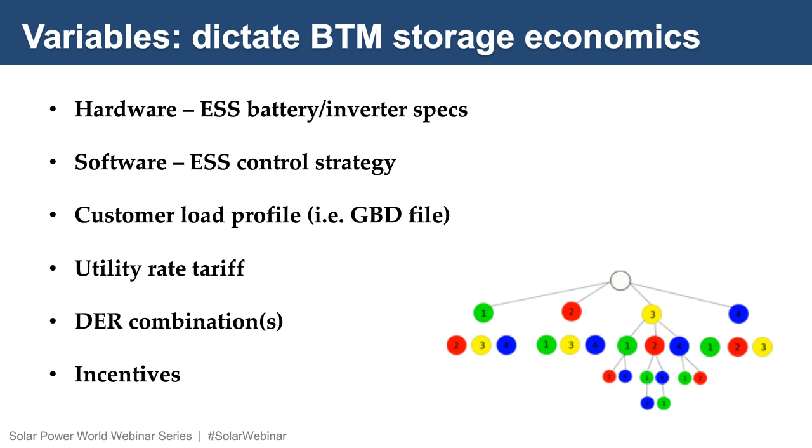So from there, I want to do a really quick overview on this term control strategy that we use. And this term can be used interchangeably with the battery management system. And again, this is the software layer or the instructions that dictate when the battery charges or discharges. And obviously it's determined by the value stream opportunity that the BMS, the control strategy, is going after. It's also determined by any other rules or constraints.

For example, maybe you have a constraint on the battery management system that says energy storage must charge from solar. Or maybe you don't have a constraint there. Maybe you have a rule that says when you run your simulation, energy storage cannot export to grid. Or maybe you do not have a restriction there. So that's really the set of parameters, and we're going to look at those and exactly how you define those in Energy Toolbase in just a second here.

Okay, I've got one last setup slide. I've been giving variations of this presentation a lot recently, and I want to include this slide and just talk very briefly because I want to draw a line between the two types of software performance modeling tools in storage.

So when we think about forward-looking performance modeling, we're kind of talking post-commercial operation date. Basically, for an operational storage system in the field. And there is a software control layer that is making predictive decisions that is dictating how that battery is charging and discharging, again based on some of those things we just talked about. If it's trying to optimize for peak shaving, sometimes this gets to be very, very sophisticated. You know, they're doing machine learning things, and there's companies that really specialize in this.

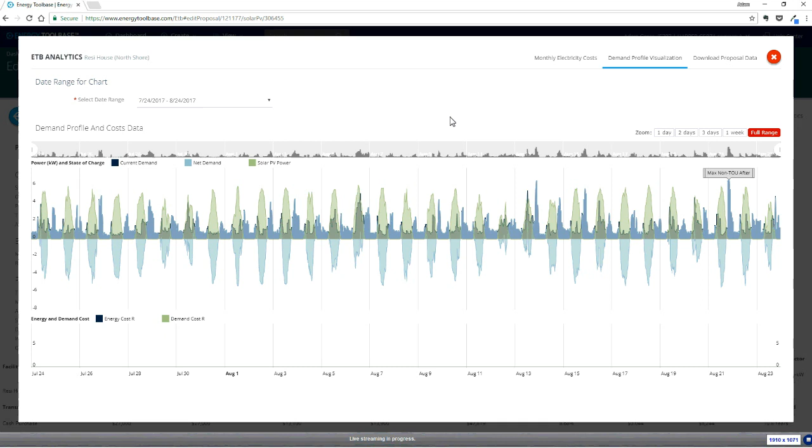We have a really nice summary view. If you jump back to the dashboard, I'm kind of hovering my mouse, I'm waiting for the screen to catch up. There you go, over here on the right. And under the export value, you can see 64% of all of our solar production is getting exported to grid for this project I set up. You know, that's crazy. We're talking about 2 out of every 3 kilowatt hours being sent back to grid.

And the way we've configured this project in step 2, this customer would be getting killed, right? I mean, two out of every 3 kilowatt hours is worth 0. And you can actually see that effect here. The average blended cost of energy for this customer is in the 27-cent range. The average blended value of solar is under a dime. And it's obviously a result of the fact that so much of our production is getting valued at 0.

Okay, so this is obviously an unrealistic project. Certainly in Hawaii, you would never sell your customer a system that's exporting that much energy, because the economics is just giving energy away for free. So let's go now. Everything else equal, I've duplicated that deal, and all we're doing here is we're going to add in a storage system. And that's managed through step 5 here in our edit proposal screen.

Let me just give you a really quick setup for the different variables that a user dictates. There's basically 2 sets of variables. One is the hardware side. We're calling this the system characteristics. For my demo deal here, I have a 10 kW, 20 kWh storage system. So that's a pretty good sized residential storage system. I'm running this at a 90% round trip efficiency and 100% depth of discharge.

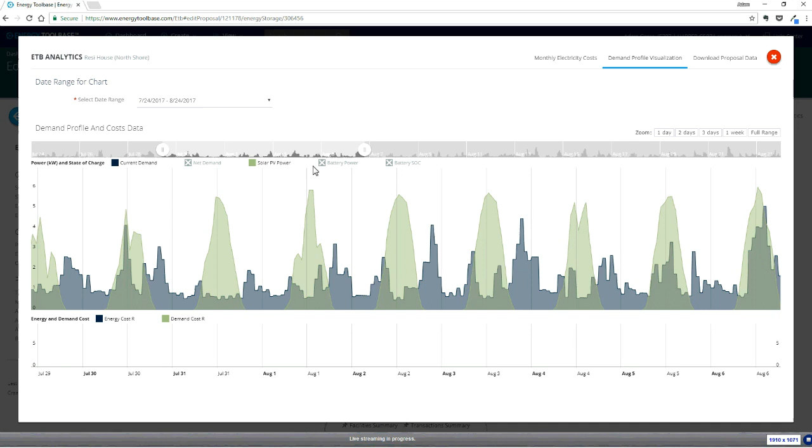Okay, there's obviously a lot of data on the screen right when you open it up. Let's just zoom in to a week, and let's do one thing at a time here. So I've got usage data on the screen only. Let's go and overlay our solar production. Okay, those would all obviously be exports. Now let's layer in our charge-discharge profile. So that's the battery performance data. And actually, I'm just going to click all of them on concurrently, and we'll talk through this. It looks like there's a lot of data on the screen, but you really need to interpret this to find out what's happening.

So let's really key in on this day right here, August 2nd. If you see where I'm hovering my mouse, a really key data point is the red dotted line. That's state of charge. So we're coming into the day empty. Actually, let me zoom into just a couple of days there. It's a really dynamic module, this visualization screen, which is nice. Okay, here we are. We're coming into the morning on August 2nd. We're producing more solar than we're using, and the battery is doing what we would expect it to do. It's charging, all the way up until 2:15 in the afternoon.

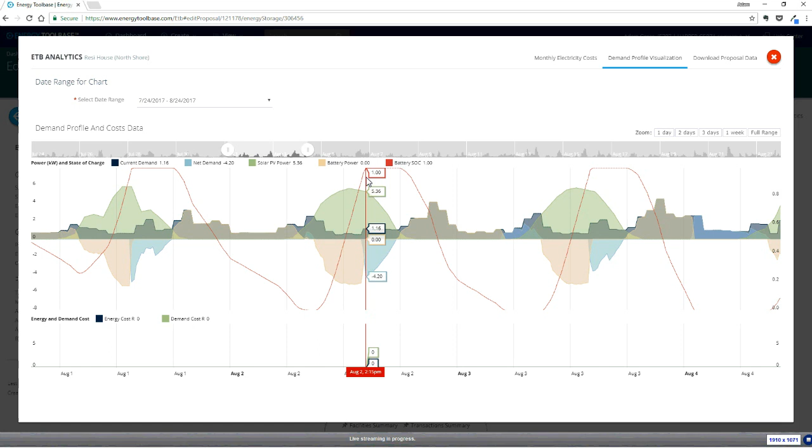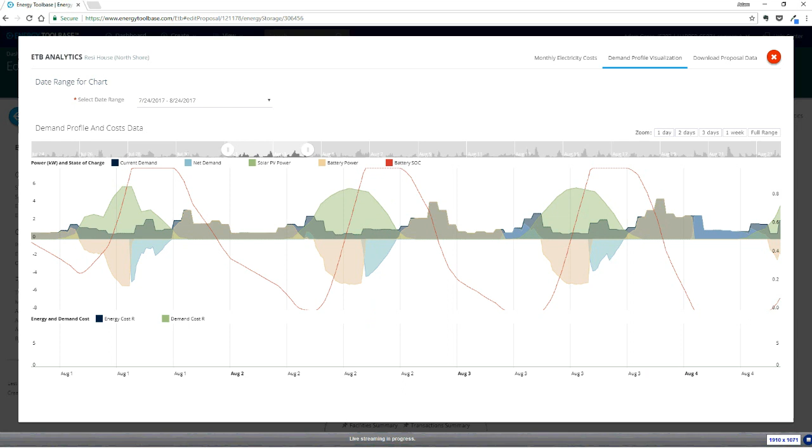At 2:15 in the afternoon, where I've got my mouse hovered right now, we've hit 100% state of charge. That's another way of saying our battery is full. We've got no more room left to store energy. So as we go later into the afternoon, you can actually see some exports to grid. That's that light blue line. If we go out to a full range, you can sort of see that same effect for a lot of different days based on this simulation.

So the battery's doing what we instructed it to do. It's preventing exports to grid, but the way the solar system is sized relative to the customer load, and based on this battery system that we spec'd, 10 kW, 20 kWh, we still are getting a little bit of exports.

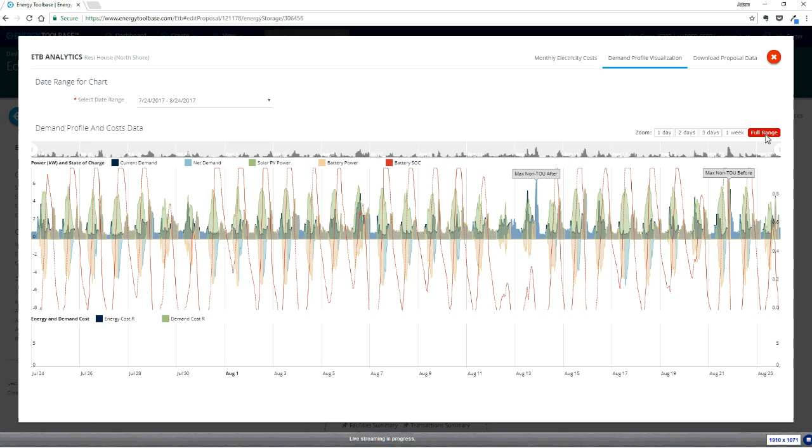We've got a really nice summary view. If I was to click out of here, let's kind of just add it up. What happened? So everything was the same except for the battery. And over here on the right, this is kind of what we looked at earlier. Whereas before we were exporting 66% of our energy to grid, we're able to knock that all the way down to 10%. That's very, very significant, obviously.

And for this particular project, where you have a really strong price signal to not export to grid, we're going to do really well. And this is also another awesome summary view here in step 5. The title of this presentation today is Quantifying the Savings of Storage, Quantifying the Economics of Storage. The most common kind of question and inquiry that we get is, well, what did my project do in dollar terms? And we've got a really nice kind of transparent summary of that number.

In dollar terms here, the blended savings on a dollar per kilowatt hour basis is $77 per kilowatt hour. It's over the kilowatt hour capacity. So a really quick way to calculate what that is, it's basically $77 times 20 kilowatt hours. So we were actually able to save $1,540 for this storage system, this 10 kW, 20 kWh, for this particular customer, just purely from storage. And obviously, this is an extreme example. This is Hawaii, and this happened to be for a customer exporting a lot of energy.

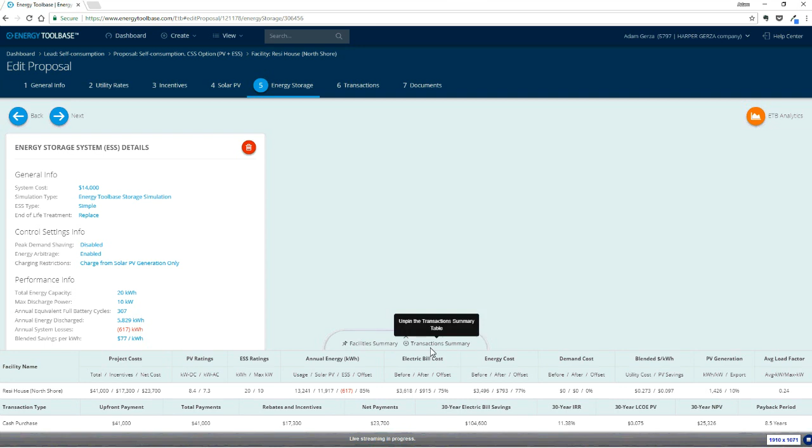Okay, now this is going to be a really awesome segue to show off our optimization engine. So a lot of you are probably already thinking, well, okay, this is cool, we got it down to 10% export, but wait a second. In Hawaii, I'm being told I can't export at all. My question is, what system size do I need to make sure I prevent all exports to grid? So let me show you how we run that goal seek. We have a really clever and really usable, intuitive tool, and that's our optimization engine.

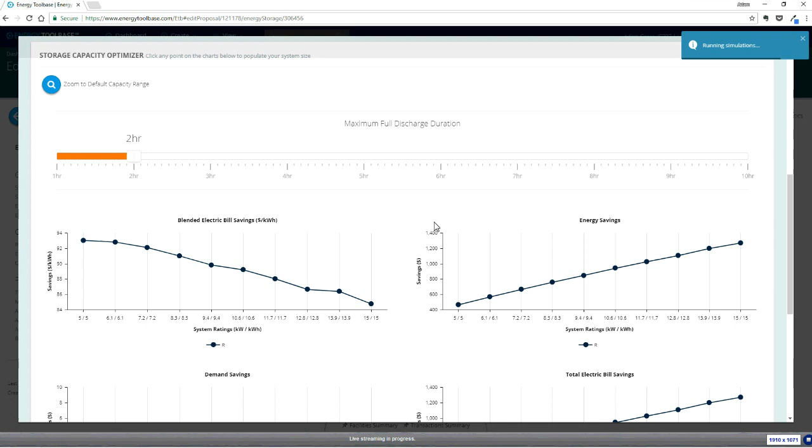I'm actually going to throttle this up. I'm going to scroll back up here, and throttle this to a 2-hour duration battery, and it'll become very clear what I mean by that in just a second. Okay, so I'm rerunning the simulation now based on a 2-hour duration battery. So what does that mean? As I hover my mouse right here on the chart, this is now simulating a 10 kW, 20 kWh. That's what we're referring to as a 2-hour battery.

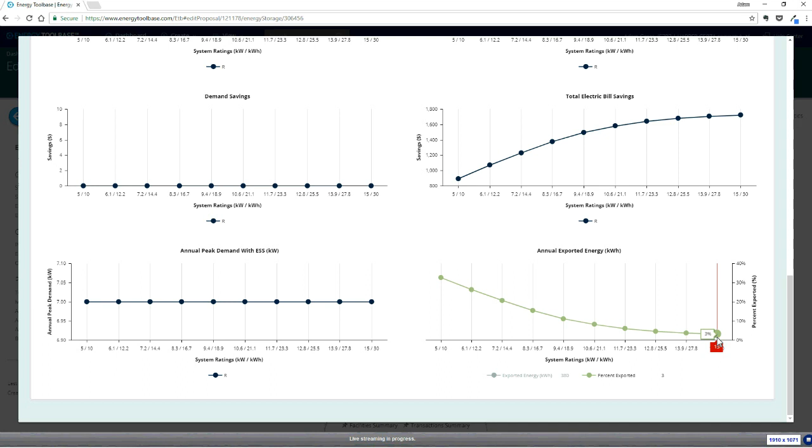So the answer to our question: even at the far end of this range, at a 15 kW, 30 kWh battery, we're actually still exporting 3% of energy to grid. So I'd actually have to go back, size a longer duration battery, or even size a greater kW battery. Or alternatively, the other trade-off would be to size down our solar system. But hopefully this gives you a little preview of our optimization engine. It's really incredibly powerful. We're going to look at some other examples in a second when you're running this for different types of control strategies.

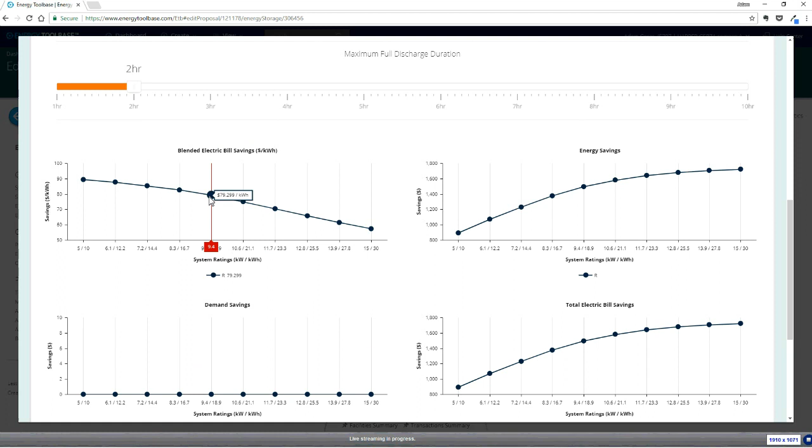So I'm going to wrap that one there. And I want to apologize in advance if I'm talking fast. I really want to get through a couple of different examples, but at the same time, I don't want to throw too much at you in the course of the 40 minutes here.

Okay, let's talk next about ToU arbitrage. For this particular deal here, I've got one that makes a lot of sense, and I've got another one that makes no sense for a ToU arbitrage control strategy. And the only thing I changed is the rate tariff. So for this one here, we're in the PG&E territory. I modeled 2 rate schedules, the EVA, which is an electric vehicle rate, and the ETOUA schedule.

So let's start with the good news. Let's keep this upbeat for now and start with a good-looking one. So let's go to step 5 really quickly and just show you what I had configured on my sizing. For this deal here, my screen is catching up. We're going to do a very standard size, 5 kW, 10 kWh. And by the way, this is another residential project.

But for those of you on the line that are thinking about modeling and extracting value on time of use arbitrage in commercial applications, everything I'm saying absolutely applies. And we're going to look at peak shaving and doing some stacking in a minute. So we're going to look really briefly at another resi one, but this certainly could be commercial as well.

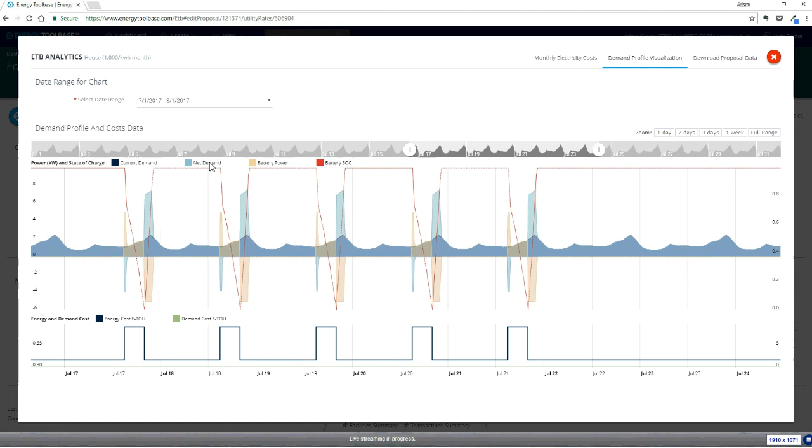Okay, so we're really getting squeezed here. Now we only have 7 cents of differential to go after. So our engine runs its simulation just like it did before. Why don't we go out wide and look at what it did for the whole billing cycle? You can see for the Monday through Friday weekdays, we're fully cycling the battery. We're still going to capture that 7-cent opportunity. Notice Saturday, Sunday, there's no opportunity because that's all off-peak energy.

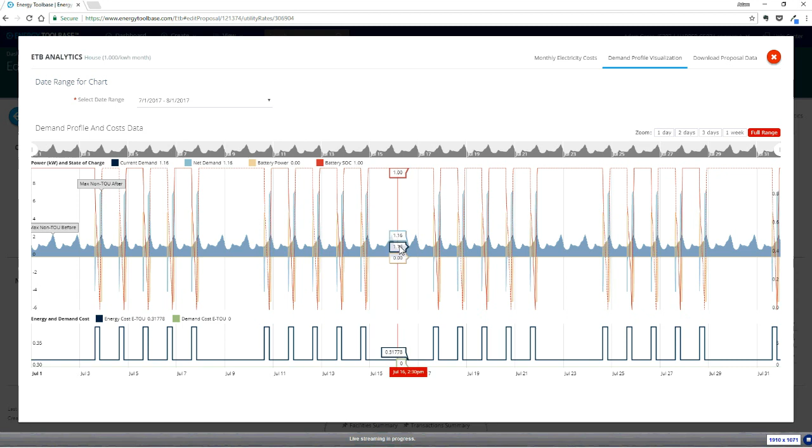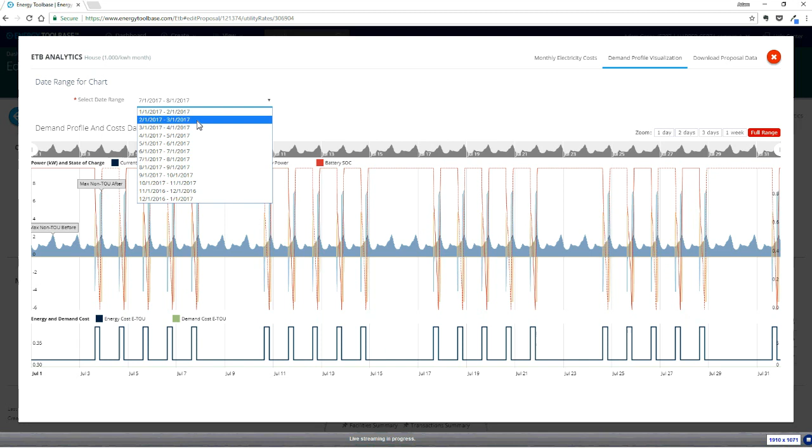One other really important thing I want to point out, which makes this frankly a not doable schedule for storage. I want to toggle to a winter month. Everything we've been looking at so far is summer. Let's go to February, March. Check out what's happening in February, March. Let's zoom in and look at the delta of the tariff.

The winter on-peak energy rate, 27.5 cents a kilowatt hour. Winter off-peak, that's not a typo, I'm waiting for my screen to catch up, there you go, 26 cents a kilowatt hour. So now we're talking about 1.5 cents of differential. That is very, very skinny, right? So if I go out wide and look at what the storage simulation did for this winter month, the answer is it did nothing. And this isn't a bug. It should have done nothing.

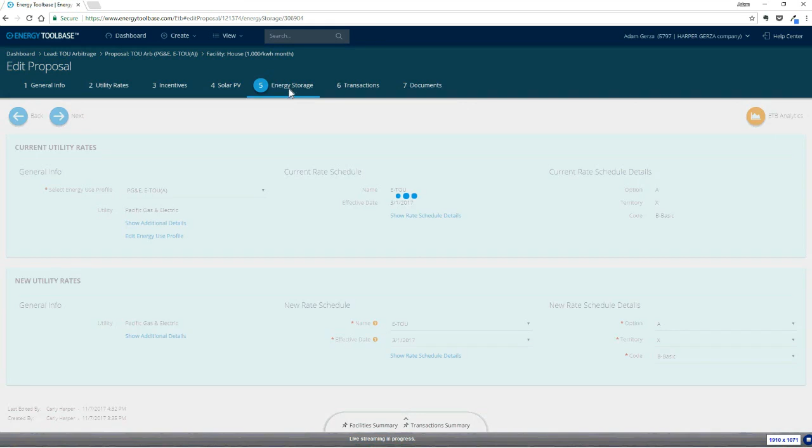And the reason why, and this is a really important insight when you think about time of use arbitrage in general terms, if we go back to our step 5 settings, I really want to plant this seed, which is round trip efficiency and how it relates to time of use arbitrage. By the way, in Energy Toolbase, you can model integrated inverter storage systems, and you can also set up external inverter systems where you have efficiency loss both at the battery and separately at the inverter.

This one here is an integrated system, and we're running it at a 90% round trip efficiency. What does that mean? Effectively, for every 10 kilowatt hours that gets cycled through the battery, you lose one of them to efficiency loss. So that's why we didn't do anything in the winter. Think about that. The differential is so skinny at 1.5 cents, we would literally be cycling at a loss, right?

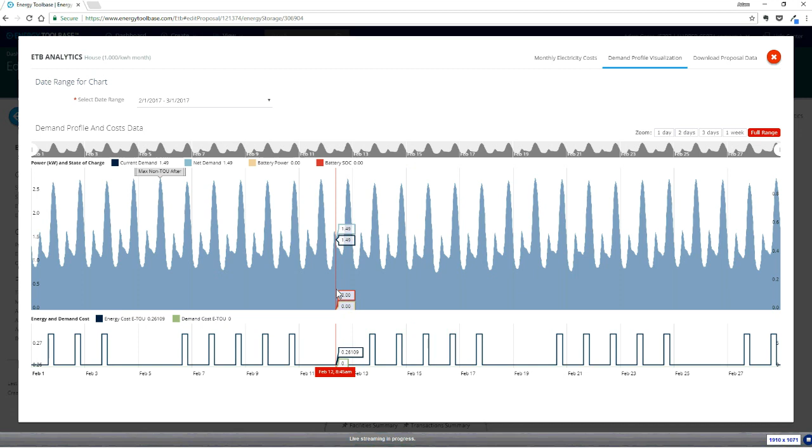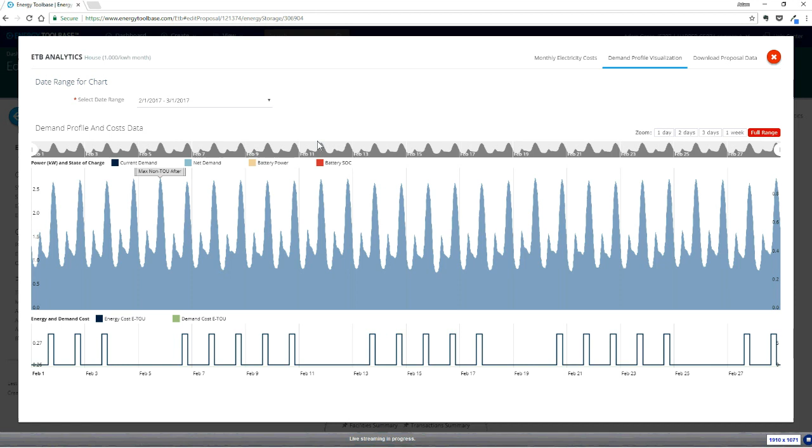You could fill up the tank in the middle of the night and discharge on peak to capture that 1.5 cents, but you'd actually be doing that at a loss because the differential doesn't even make up for your round trip efficiency loss. This is a really good illustration of why this is frankly a terrible schedule for storage, for time of use arbitrage anyway. One other thing I didn't mention, and this is really all about the winter, because the winter just doesn't offer us an opportunity. The way the winter is defined in this schedule, it's an 8-month winter. So we're getting squeezed again there. It's an 8-month winter and a 4-month summer.

So those are the sorts of things on arbitrage that illustrate that it's all about what the rate schedule offers. Not only the differential, because that's important, but also how the seasons are defined, and whether weekends are all considered off-peak. To sum this all up the same way we did last time in step 5, we only ran 88 equivalent full battery cycles for the year based on our simulation, and the savings are almost zero. There's just no savings opportunity. We could save $30 for the entire year running a perfect arbitrage simulation there.

Okay, so that's ToU arbitrage. Again, I'm having to move fast because there's a lot of material to cover, and I'm just teasing this for now.

Let's step into peak shaving, which is kind of a whole conversation unto itself. So I've got a commercial project set up on peak shaving. Let's go into a storage-only project to start with. And just to give us a little bit of context, we're going to model an SDG&E, San Diego Gas and Electric, AL-TOU schedule.

For those of you that don't recognize this schedule, this is a very lucrative, great demand charge management schedule, just because it has very high demand charges. And again, this is storage only, so let's see what we configured here in step 5. We've got a 40 kW, 80 kWh battery, and on the hardware side and on the control setting side, we are basically just doing peak shaving. So let's look at how that simulation runs and interpret those results.

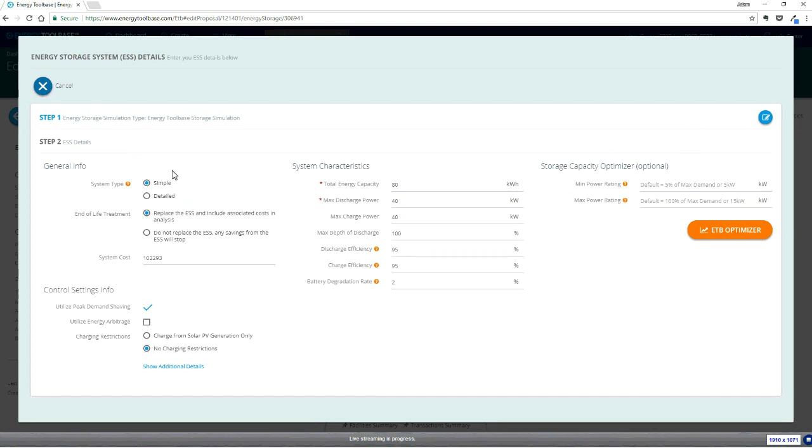Awesome. I'm seeing a lot of questions coming in. Please keep shooting those over. We're going to tackle those at the end, so keep chatting those over, please. I know I'm covering a lot of material, and maybe it would have been more effective to stop and pause, but we're going to do Q&A at the end.

Okay, so let's overlay our storage simulation, which is based on a peak demand shaving algorithm that we instructed the engine to do. Again, 40 kW, 80 kWh. And you can see the dark blue, the before load, and then the light blue, the after. And you can really start to see where we're shaving down to. And it's a pretty similar shave, just shaving off the top of those spikes throughout the day.

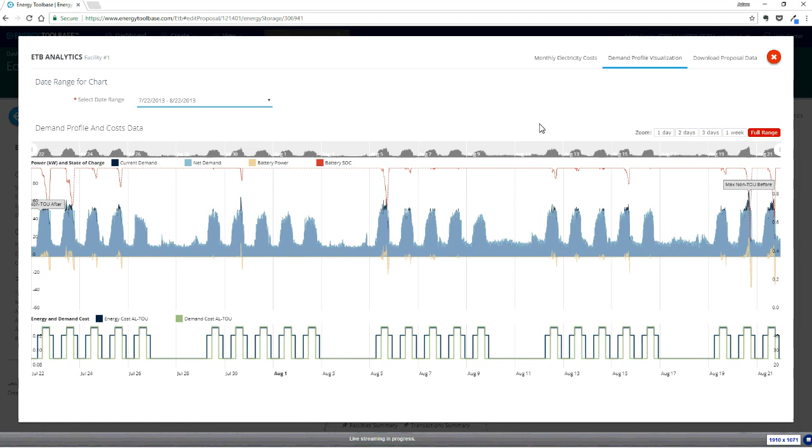Remember, this is like a 10-hour shoulder. So this guy has a long duration ramp up. So the 40 kW, 80 kWh size battery is just able to take off some of the tops there. And again, we're looking at one billing cycle. To really unpack this, a lot of times you're going to want to scroll from winter months to summer months and get an idea of, as the customer's load profile changes, how does the simulation perform? And again, it's really nice in Energy Toolbase. We're fully transparent to show you both at a detailed level and at a summary level what happened.

So let's unpack what happened. On a summary level, this is actually very, very lucrative. We're actually getting about $100 per kilowatt hour of savings. So 100 times 80. We saved about $8,000 doing this standalone storage project for this particular customer, for that 40 kW, 80 kWh. Again, standalone storage. Let's go now and look at pairing it with solar.

And again, I've kept everything else the same. So when we go and look at this deal, the load profile is the same. The rate schedule is the same. The step 5 energy storage parameters are the same, 40 kW, 80 kWh. The only thing that we're doing differently in this particular deal is we're adding in a solar system, a 75 kW DC rated solar system. So let's go look at the visualization and how the simulation changed.

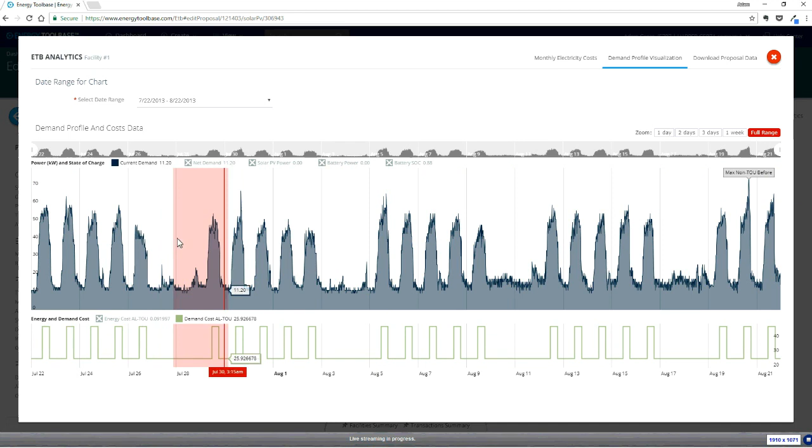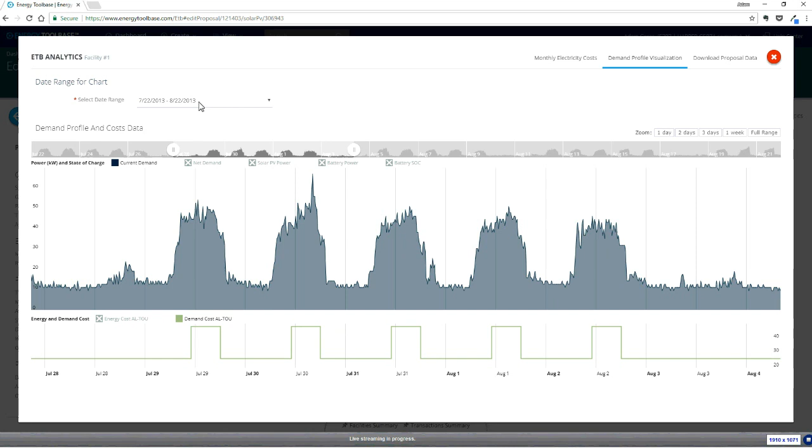So let's start with one thing at a time here. Let's just look at usage data. I like zooming in on a week. I think it just gives us a little bit more focus on what's happening over the course of a week. Okay, so same load profile. We're now in a summer month, which is why it might look a little different. This is July, August. Let's overlay our solar system.

This data here, I believe we used our HelioScope integration, which is one of our friends and partners. So the user chose to import their 8760 production data from HelioScope. Energy Toolbase is operable with every solar production calculator out there.

So we got our solar overlaying against our load. Now let's look at this new simulation and notice it's really entirely different when we're pairing it with solar. And in this case, it's awesome because it's really, really complementary. I'm actually going to try this. Let's zoom into one day and really unpack and think through that day.

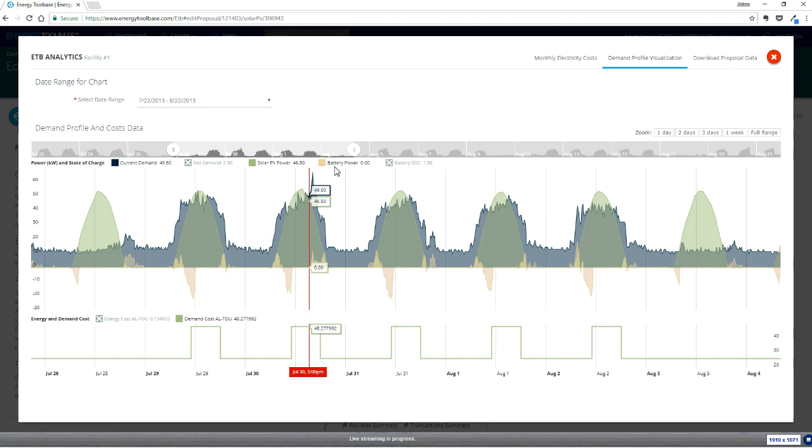So think about what's happening here. Early in the morning, the customer starts to ramp up on their load. Starting at 7 a.m., 7:30 a.m., they're already kind of spiking on their load. The solar really hasn't come online yet. Solar's just waking up at that point of the morning. So when we overlay our battery simulation for this day, check out what's happening.

We're really complementing the solar by shaving down that early peak and getting it until about that 8, 9 a.m. hour when the solar starts to come online, and we can actually overlay net. So check out that net. You can really see a pretty significant reduction. Let me actually go out a little bit wider. Sorry, I'm jumping around a little bit here.

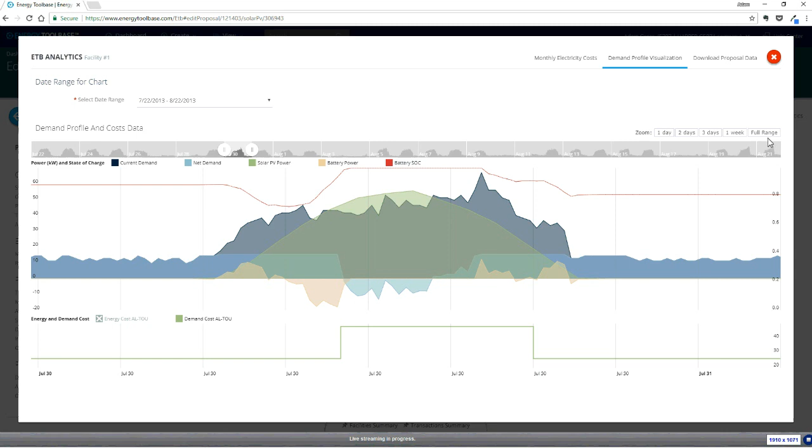What I want you to key in on here is what the original load was, and then look at the light blue line. There's a big gap there, so this is awesome. The solar and storage is really able to knock out and shave down a lot more demand than the storage could do on its own, which again is a function of this load profile.

And this load profile lends itself really nicely just because it's got that 12-hour shoulder, 7 a.m. to 7 p.m. The solar really knocks out all of that usage midday. The storage complements it nicely by discharging early in the morning, then it recharges, and then discharges again late in the afternoon on the back end of that shoulder. And that's a pretty similar looking simulation.

There's a lot that's been written about this topic and how solar and storage are complementary with one another. A really great report just came out last week from LBNL and DOE, where they talked about the synergies and the increased saving opportunity from storage when you're pairing it with solar.

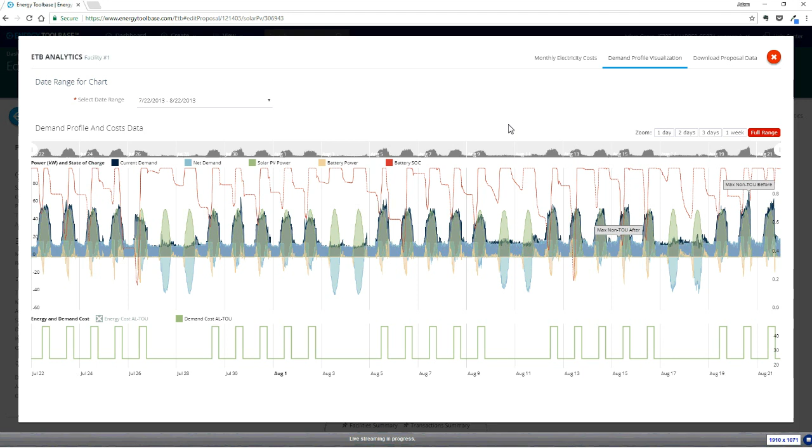And again, here in step 5, we can zoom back out and see that our blended savings value for just the storage increased relative to when we ran storage only. So again, this is the solar plus storage project. The savings from storage coming in at 107 per kilowatt hour, well, that's better on a $1 per kilowatt hour basis than storage could do on its own. That's the takeaway there.

Okay, I know I'm moving really fast. I've got a couple other roundup slides that I want to go through before we pass it back for Q&A. So I think I'm going to transition out of the demo and run through a couple of my last slides, and then we'll go to Q&A.

So let's talk very briefly about a question that's coming up a lot. If you're a solar developer and you've got a lot of customers, you're obviously thinking, where should I focus my resources? Where are the best savings opportunities? What are the best use cases? Obviously, the utility rate tariff side is going to be a big driver.

So if you're doing C&I and peak shaving, peak demand charge management, you obviously want to compete against high demand charges. This is a back of the napkin number that I know some C&I storage developers use. If you have over $15 per kW demand charges, it's certainly worth looking into that project. If you're doing time of use arbitrage, as we just looked at a minute ago, you want to compete with wide time of use differentials. The wider the better.

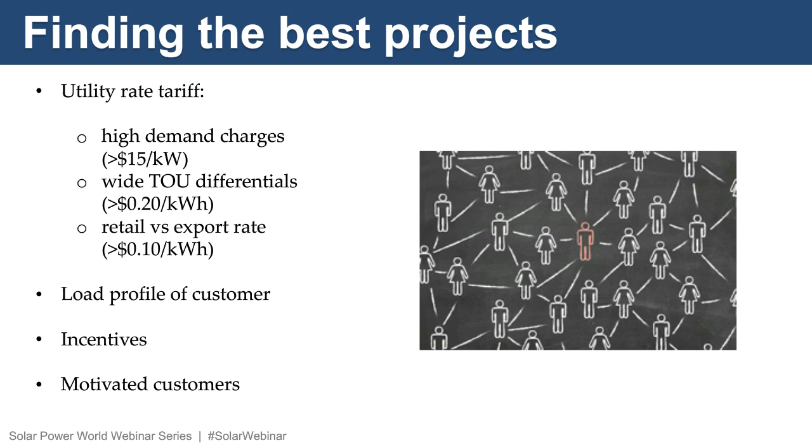Obviously, another one, incentives. I'm not going to talk more on that. That's pretty intuitive. The next one I do want to talk on is the motivation of the customer. So, everything I've talked about for the last 30 minutes has been about quantifying the savings opportunity from energy storage as a result of the rate tariff that the customer's on and the load profile that they have. But the reality is, in a lot of the conversations we're having right now, there are other motivations where customers are going out and buying storage systems.

And if you're a sales guy, if you're a developer, a lot of these other things are things you're going to be highlighting. Obviously, backup power is a huge one. Not as easy for us to quantify an actual value on what that is worth, but in a lot of cases, customers are doing storage projects just for that backup component. Energy independence. Obviously, a lot of these early movers are folks that have solar systems, that have EVs. They want to produce their own energy, charge their automobiles with it, and be as little reliant on the utility as possible.

Future-proofing solar savings. I'm actually not going to have an opportunity to talk too in-depth on this. Maybe I'll just spend 30 seconds. This effect is very much happening in California right now. In California, all three of the big IOUs are proposing pretty significant changes to the time of use rates. And what's effectively happening with the on-peak windows shifting much later into the evening is that the value of solar is getting eroded.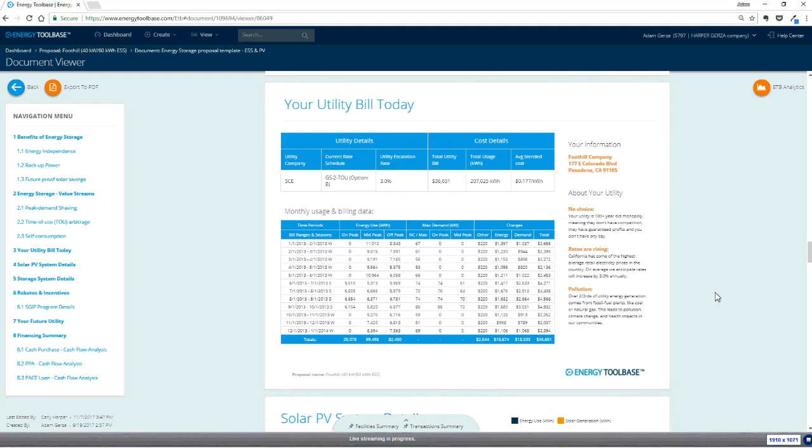We could talk really technically about all the finer points of modeling storage projects and goal-seeking optimizations, but that's not good if it doesn't get you to a finished deal. So I want you guys to know, as my parting thought here, Energy Toolbase is thinking really in depth about ways to communicate this analysis to your customer, and we're going to have a lot of awesome templates in our library that you can kind of take and run with and really showcase some of those other benefits.